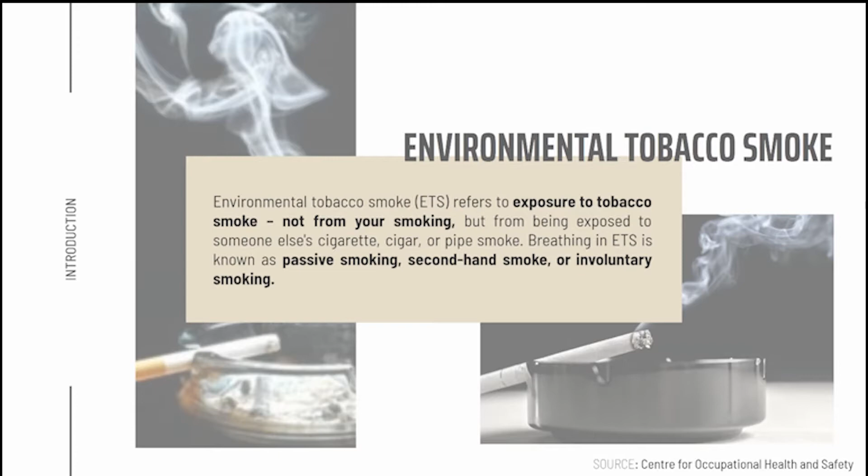As I introduce my research, I wanted to ask each of you: have you ever been in a room full of smoke, or a room where no one is smoking yet you can still smell odors that might be coming from a cigarette? If yes, that is simply environmental tobacco smoke, or ETS for short, which refers to tobacco residues that can be passed to a non-smoker involuntarily through breathing and touching contaminated areas.

According to Tobacco Atlas, there are three types of smoke exposure: first-hand, second-hand, and third-hand smoke, wherein residues of tobacco products stay longer than we actually know, and if not properly cleaned or sanitized, it can lead to worst-case scenarios.

Scientific study shows that smoking indoors drastically increases the concentration of air pollutants. Some studies have also shown that higher, consistent levels of toxic particles can be found when air is recirculated, such as in air-conditioned environments. Here are a few of the thousand air pollutants and carcinogens causing cancer that can be found in third-hand smoke or environmental tobacco smoke.

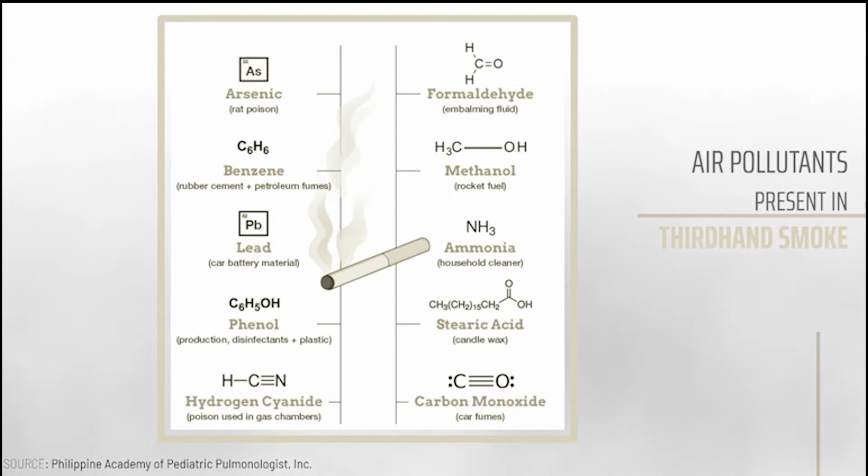As for existing basic precautions regarding third-hand smoke, it has been proven that it cannot be eliminated simply by opening windows and providing good ventilation. We usually use bleach, ammonia, and other chemicals that can also leave residues, releasing particles into the air that may still cause issues with breathing and allergies.

There are also three phases of how ETS can affect our health. It may start with simple asthma and coughs, ear infection, and in worst case scenarios could lead to cancer and other respiratory diseases. As per study, tobacco smoke contains more than 7,000 chemicals, including hundreds that are toxic and about 70 that can cause cancer.

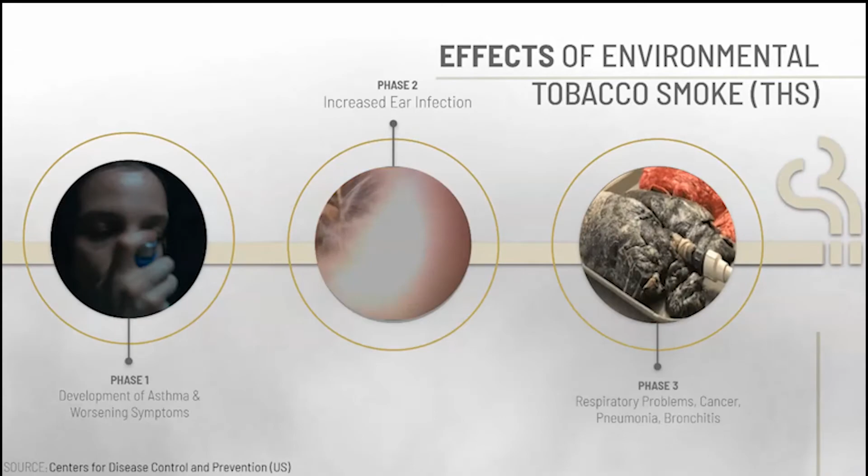According to the World Health Organization, 15 billion tobacco products are sold worldwide, and it also shows that 43% of male Filipinos and 8.5% of female Filipinos aged 15 years old and above have already started smoking. Additionally, 10 Filipinos die every hour due to tobacco-related diseases.

The tobacco industry is a powerful force that does not fear the actions of smaller nation-states because of high demand and global market power. In this light, it can be seen that in 2016, the revenue from the top 6 largest world companies was almost equal to the gross national income of our country.

Aside from revenues our country can get from the tobacco industry, the Philippine tobacco industry is also known as the strongest tobacco lobby in Asia. The Philippines is also the 15th biggest consumer of cigarettes in the world.

To cater to the high demand for tobacco products, 0.29% of agricultural land is devoted to tobacco cultivation, distributed in 23 provinces all around the Philippines, covering approximately 30,352 hectares that can produce at least 84.96 billion pieces of cigarettes a year. Now that I have discussed environmental tobacco smoke, smoking, and the tobacco industry, let's move on to the coexistence of smoking and gambling.

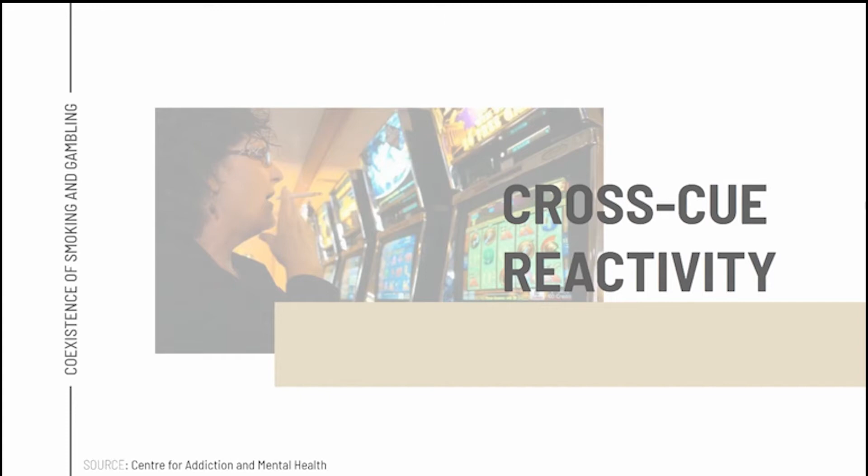According to the study by the Center for Addiction and Mental Health, they examined cross-cue reactivity among batches of regular smokers, casino players, and cigarette-smoking casino players.

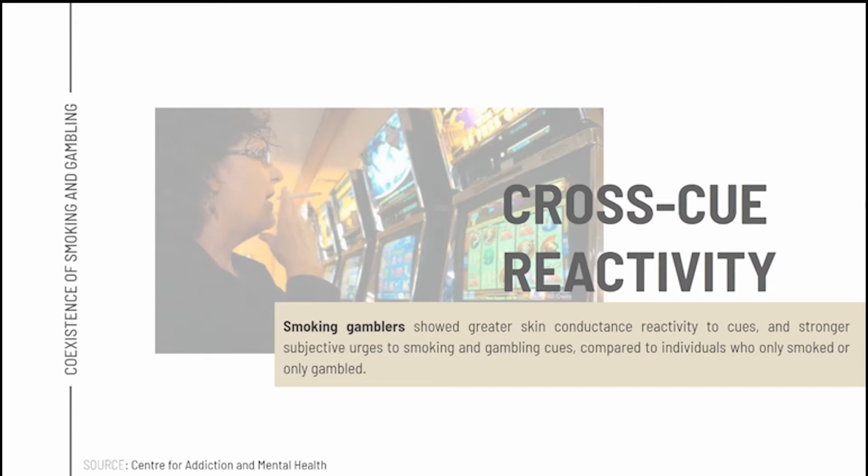They are all exposed to discrete cigarette, poker, and neutral cues, while skin conductance and psychological urges to smoke and gamble were measured. It showed that smoking gamblers had greater skin conductance reactivity to cues and stronger subjective urges to smoking and gambling cues compared to individuals who only smoke or only gamble.

According to the 2015 Gambling Prevalence Survey, 79%, or a total of 17,314, are confirmed smokers and gamblers at the same time, and the bigger portion of the respondents were males.

According to PAGCOR, the Philippines ranks fourth for having the highest gambling revenue based on tourists in the whole of Asia, gaining a 22.9% increase from the year 2018.

On top of that, the top four casinos are located in the capital of the Philippines, which is Manila, attracting more tourists to come. Based on my research, casinos were located alongside high-end hotels, wherein they attract or lure hotel guests through a typical casino layout.

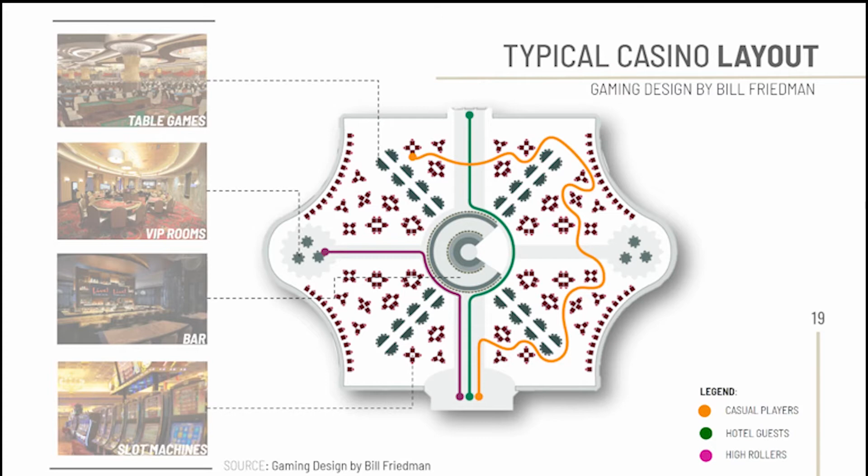As for the casino designs here in the Philippines, designers incorporate low ceilings and bright lights to make gamblers lose track of their time.

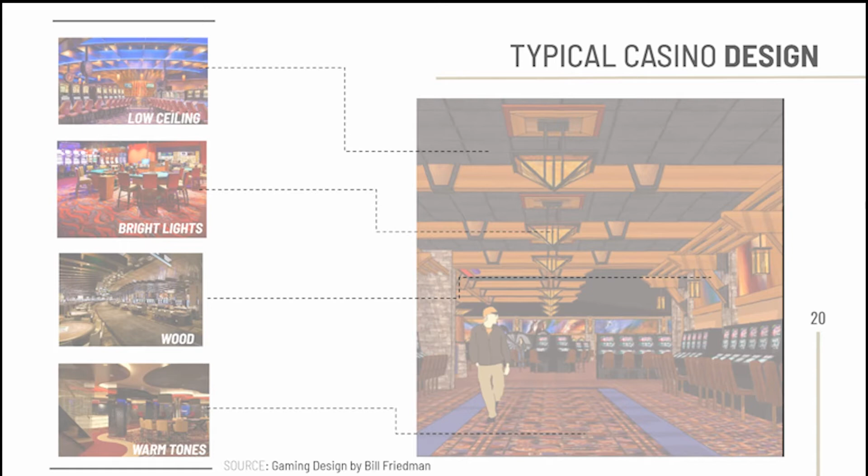One of the key ways that casinos keep their guests from going home is by engaging all their senses. Most casinos here in the Philippines allow smoking on their premises.

Most casino owners, led by the President and Chief Executive of Manila Casino Travelers International Hotel Group, Kingson Sian, wrote a petition to President Rodrigo Duterte to be exempted from Executive Order Number 26, or the smoking ban law.

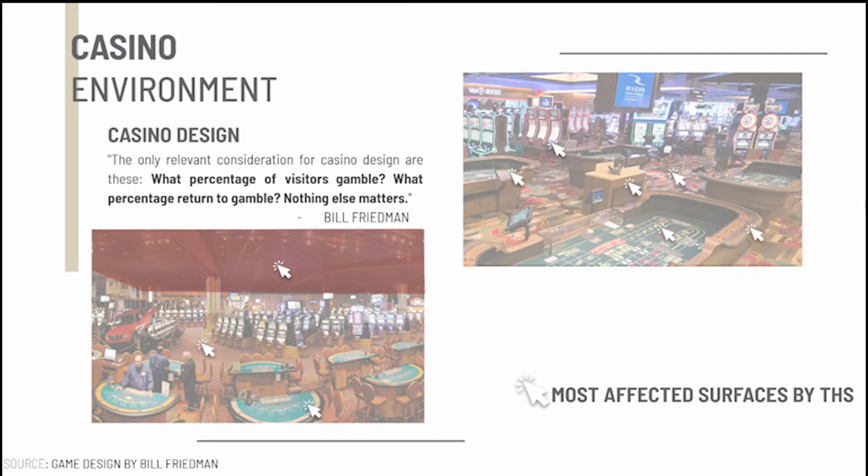Furthermore, these are the most affected surfaces by third-hand smoke, namely the ceiling, floors, walls, and gaming tables. These are some of the simulations I made based on the research of smoke behavior from the Philippine Academy of Pediatric Pulmonologists Incorporation.

This study aims to improve the indoor air quality in Philippine casinos and to propose an alternative surfacing material by utilizing locally found raw materials to address the main problem of the study.

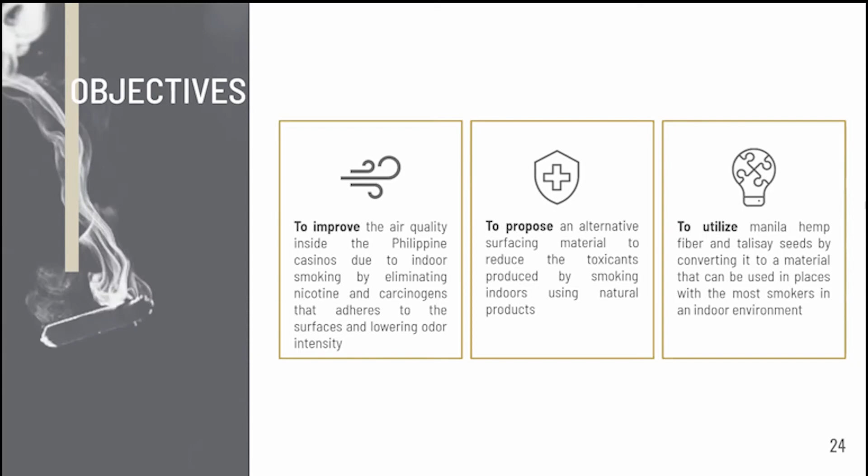This study will be beneficial to the development of science in studying other possible uses for Manila hemp and Talisay seeds, especially in preventing the transmission of substances from tobacco products inside spaces which are subjected to environmental tobacco smoke.

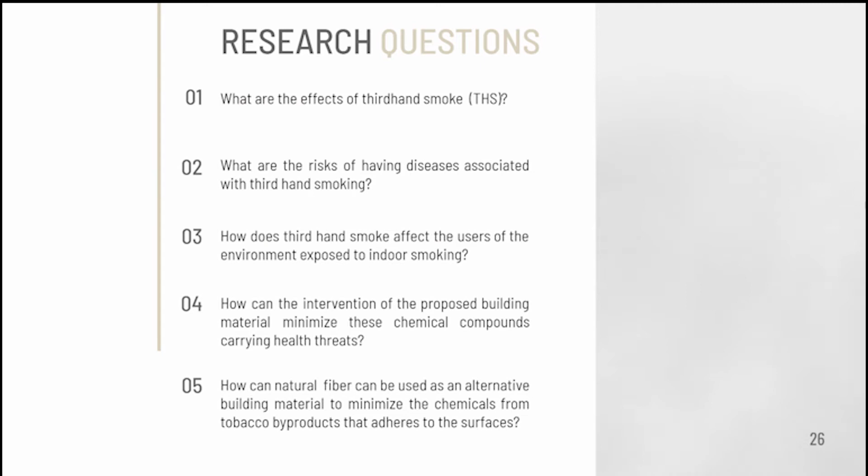This study will discuss the effects of ETS, down to which natural fiber can be used to mitigate the environmental issues caused by ETS.

These are the whys this research must answer in order to come up with an appropriate thesis statement.

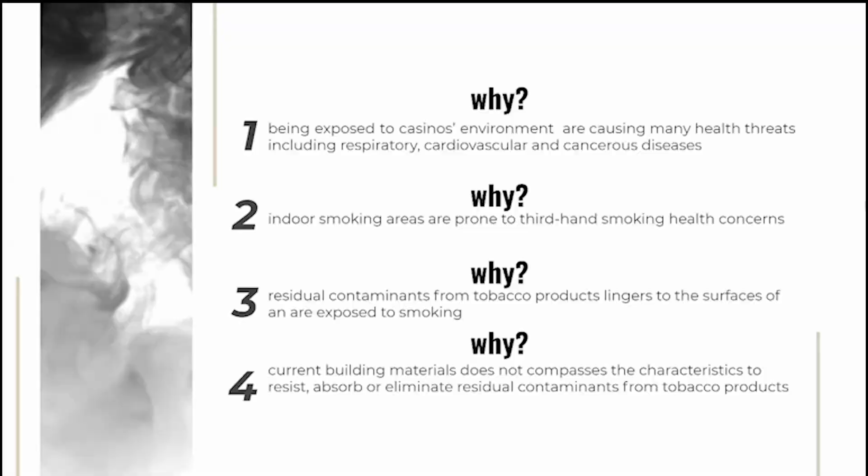After analyzing the dialectics of the study, I found out that exploring the capabilities of Philippine agricultural products can actually help minimize ETS health risks.

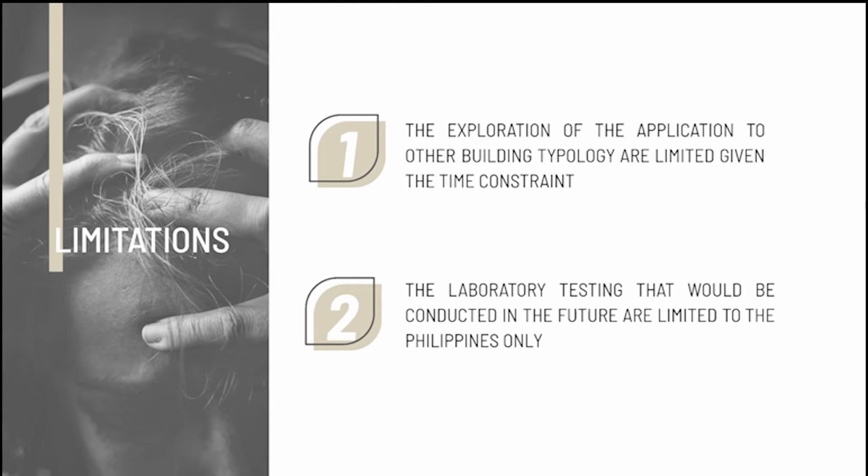This study is limited to one typology, which is the Philippine casinos, but is open to further study in the future. Some tests are also limited, and only tests made before the pandemic will be shown.

Now we're down to the frameworks and related studies of the research proposal. The process started by identifying the focus of the study, which are the casino environment, environmental tobacco smoke, and the application to architecture.

The effects of third-hand smoke were then identified, which led to finding a certain common ground for the three main concepts of the study.

Developing a material will then lead to sustainability within the design study, which may account further into lowering health risks we can get from third-hand smoke.

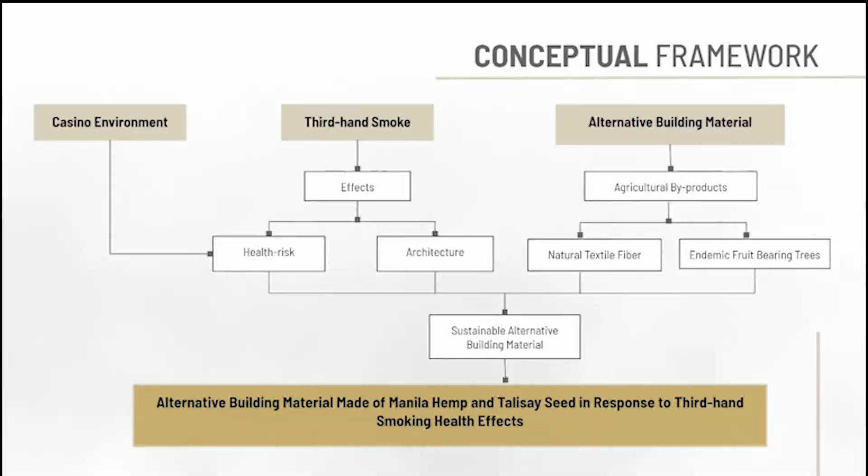So this will be the flow of the whole study, starting from defining the research area, which we did in the first part of the presentation, and now we're on to the material research in order to create our final alternative building material.

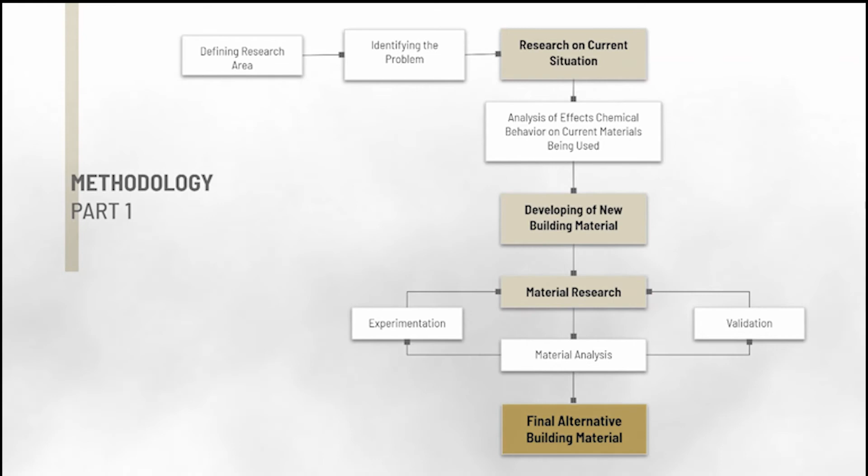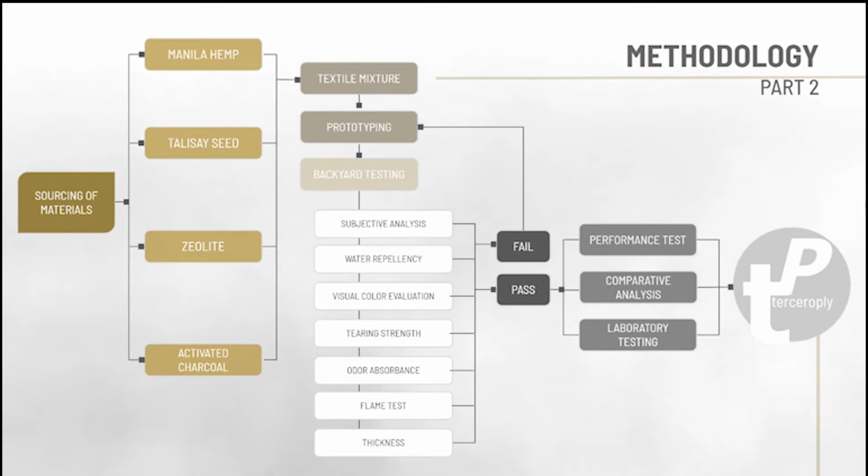For a thorough process of how I did my material research and analysis, I started with finding the most possible raw materials that are abundant in our own land, and then underwent various testing and analysis to determine the best formulation to create the material.

We will now be digging into the development of the end product of the study. I have studied the potentials of three natural fibers found here in the Philippines.

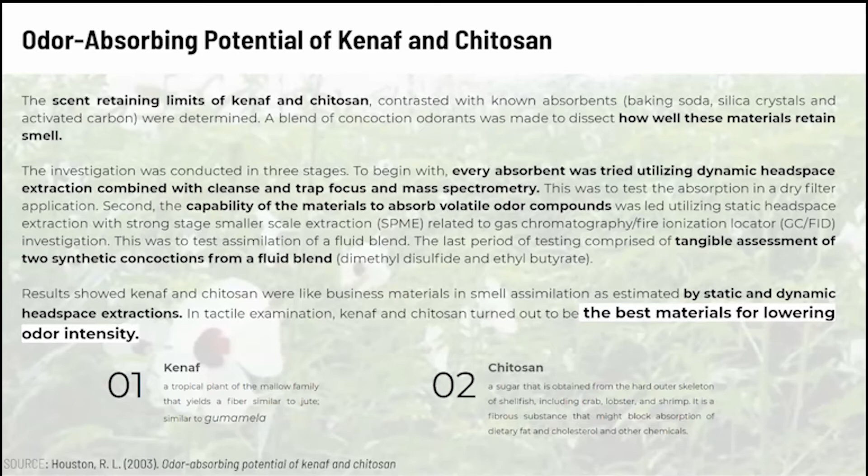The first one is the kenaf, which, according to the studies, can absorb odors when incorporated with textiles. It has many pores that serve as a natural trap. So this is simply the study I was talking about, the potential of kenaf to absorb air particles.

So this is salago. It is usually harvested in wild forest here in the Philippines. Its fiber is often used in combination with other fibers. It is known to contain natural mucilage that helps disperse the fibers.

It also has its own natural resistance to insects. Finally, the last one is the Manila hemp, also called Musa textilis or abaca fiber, which has a highly porous surface, making it a good absorbing material that can trap odor and dirt. It also has high tensile strength, making it good for building purposes.

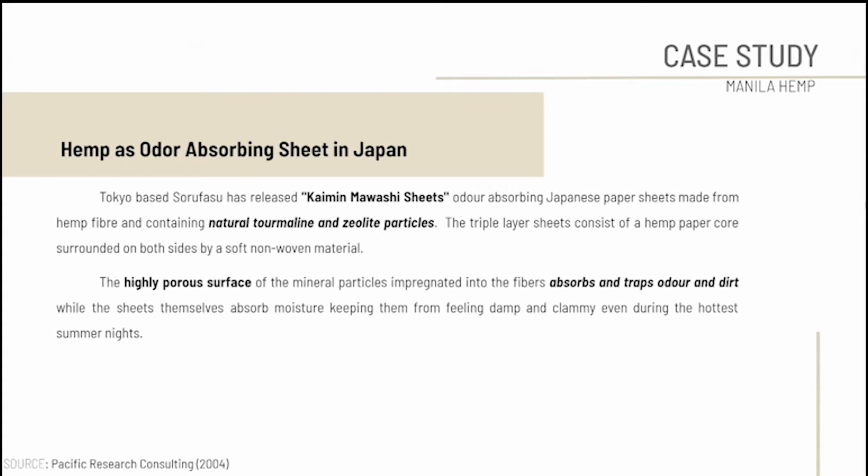Manila hemp is being used in Japan as a bed odor absorbing sheet. Another study also showed that Manila hemp, or Musa textilis, is being used as the filtration sheet in the surgical face mask we tend to use now on a daily basis to protect ourselves from getting or transmitting diseases.

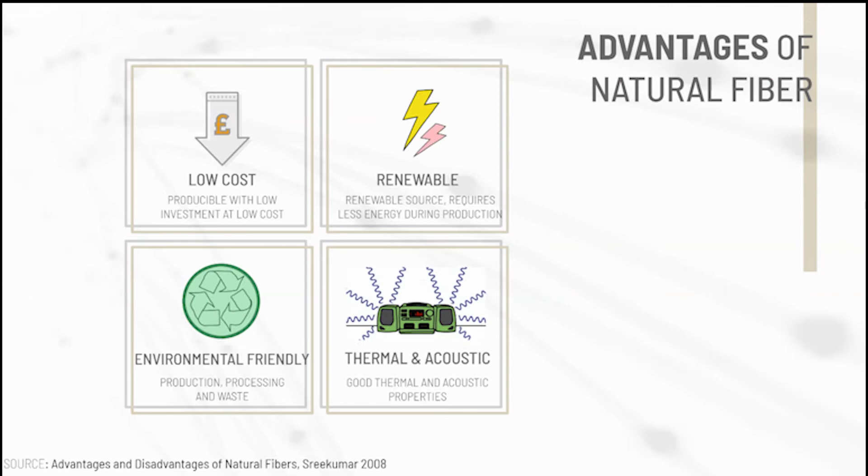Why did I choose natural fiber? Simply because it is very cost effective, sustainable, and has a lot of natural properties that can be incorporated through architecture. So this is the list I made to choose which of the natural fibers I studied had the most potential.

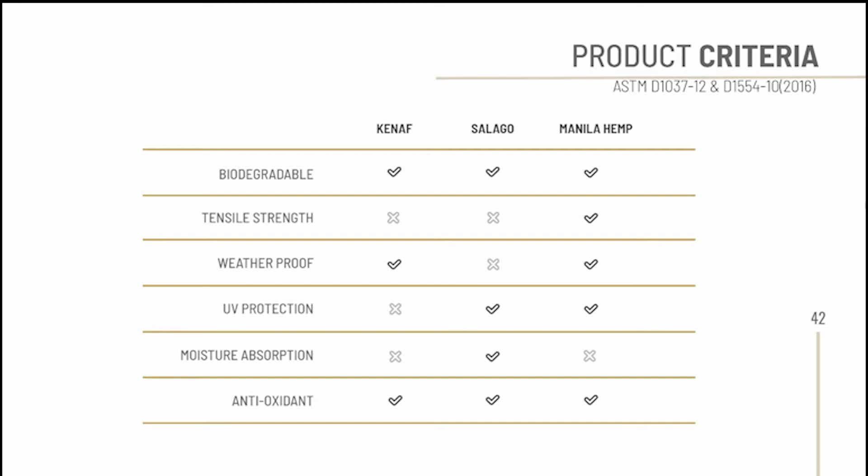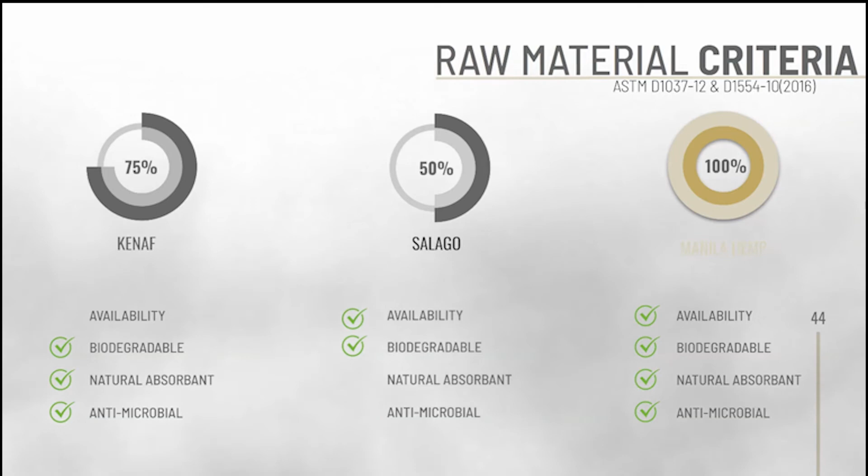These are the standard test methods I found in the database and studies from the Philippine Fiber Industry Development Authority. In this slide, we can see that both of the criteria I made showed that Manila hemp got the highest result. This is the production process for making the final product.

Stage 1: the fiber production. Preparing the fibers, weighing it. And now for the binding agent, I use zeolite and activated charcoal as an additive.

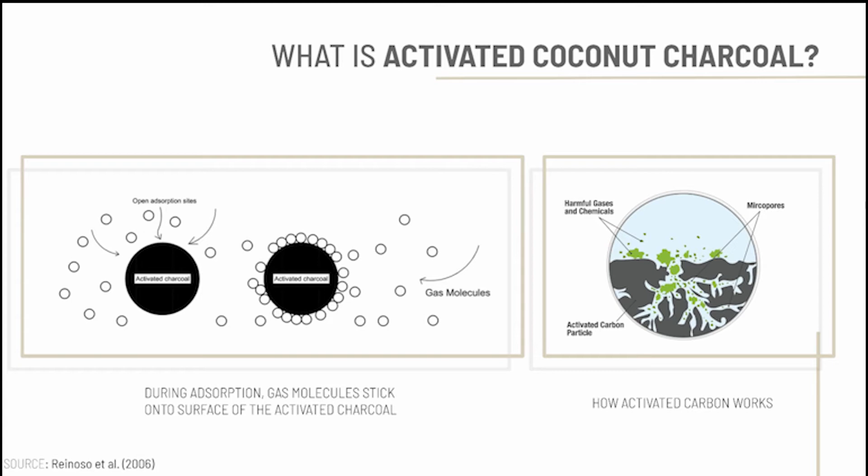This is what they look like. The potential of activated charcoal varies from a wide range. It can both adsorb and absorb tiny particles because it has small, low volume pores that increase the surface area available for chemical reactions. Another info is that 1 gram of carbon can cover 1,000 square meters.

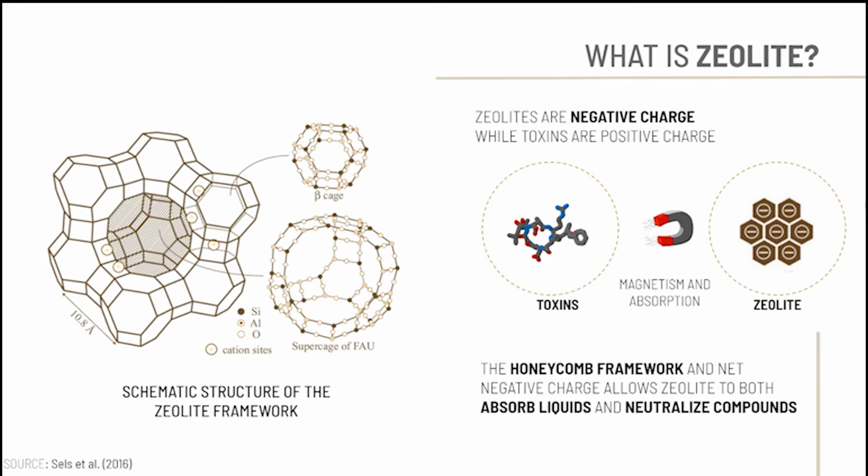Last but not the least, I also use the seeds of the Talisay tree, also known as the umbrella tree. Its seeds can be compared to a pili nut. It bears abundant fruits that just fall on the ground, being neglected. Studies about its seeds show that its natural oil can bind and precipitate proteins and various other organic compounds including amino acids and alkaloids.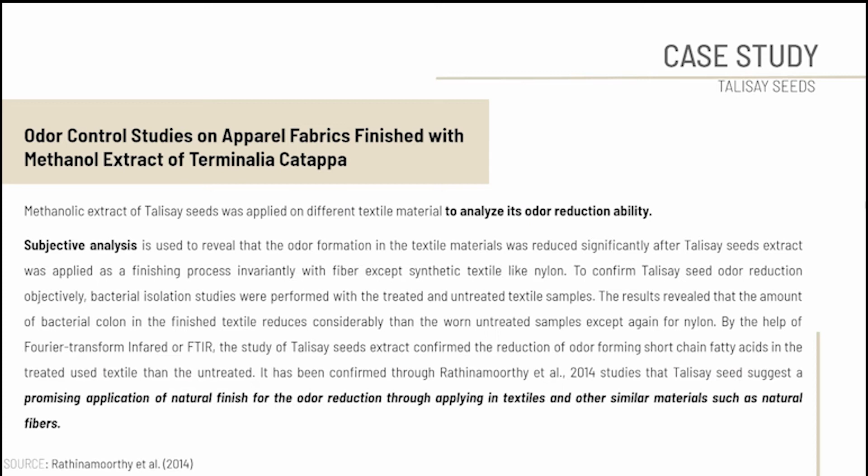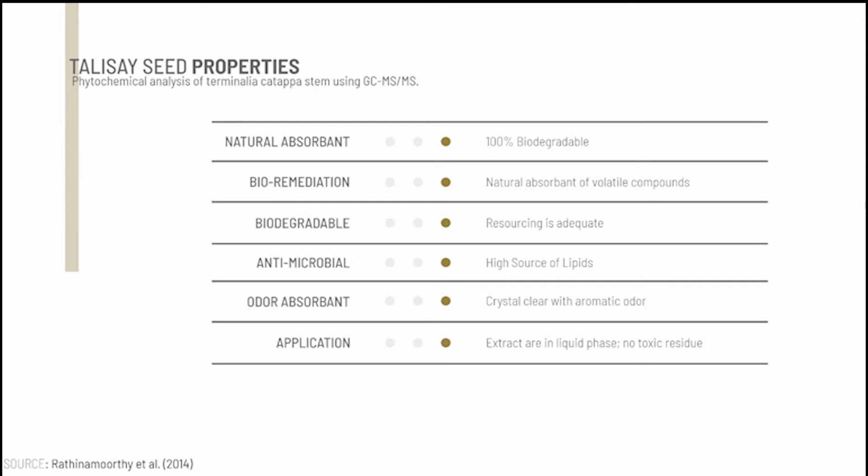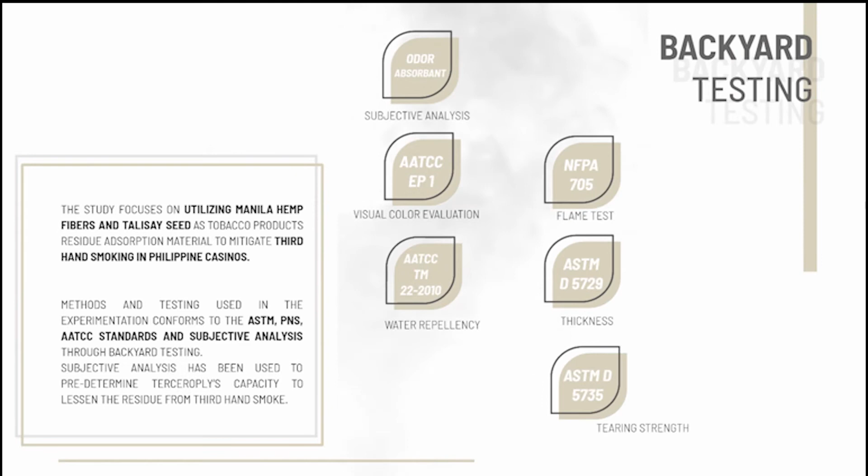Let's move on to the tests I have conducted. First, I had backyard testing for the following tests listed on the screen. I initially made 4 test samples.

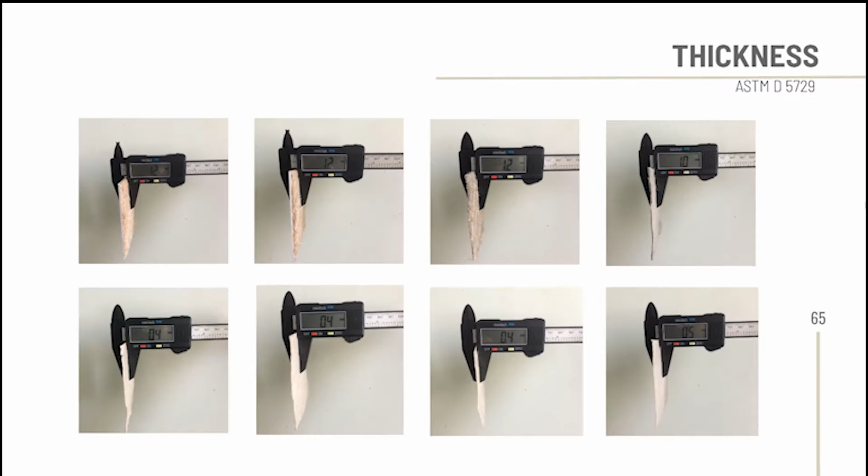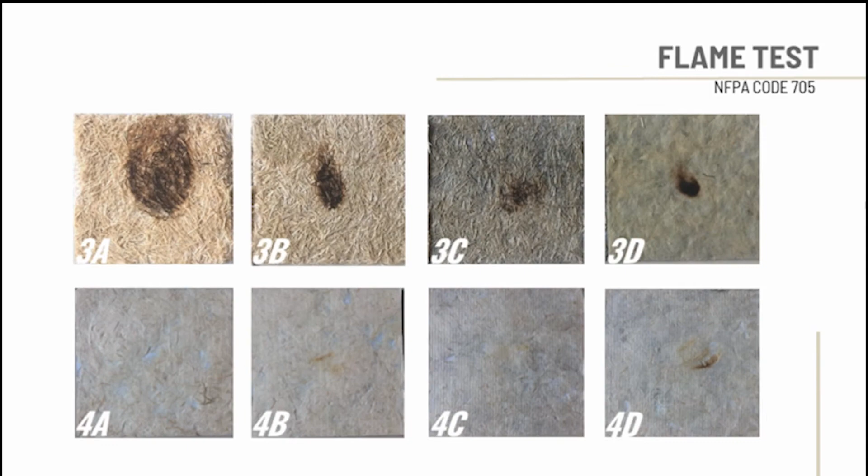Here I measured the thickness of each sample. I also evaluated its visual color, conducted a flame test, measured its water repellency, and lastly conducted a tearing strength test. These are my initial findings, which led me to further evaluate test sample number 4, for it mostly passed all the tests I conducted.

Now for the laboratory testing, final products were produced and tested at the Department of Science and Technology, Forest Products Research and Development Institute at the University of the Philippines, Los Baños. I wasn't able to collect the specimen used for the testing due to the lockdown.

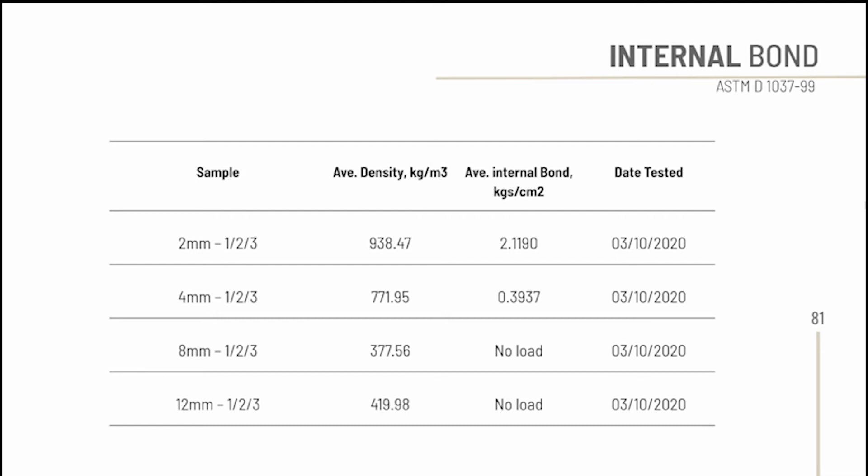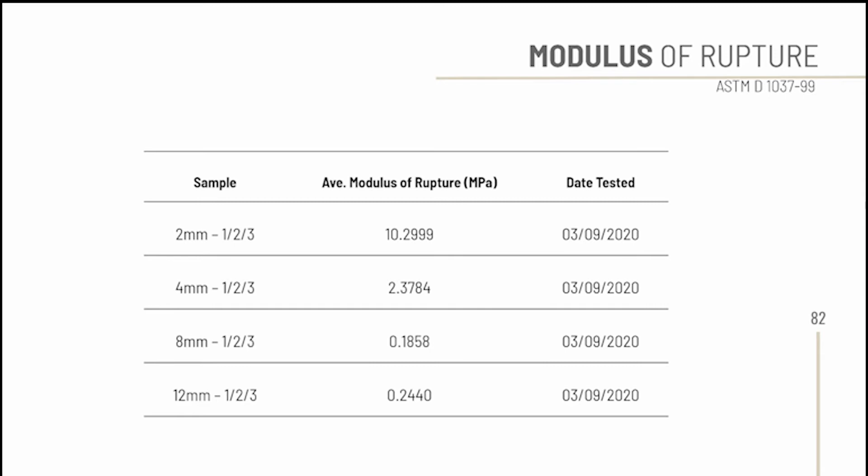The result for the internal bond showed that the thinnest sample needs a higher load to break the bond between layers. For modulus of rupture, it showed that 2mm and 4mm can be used on most surfaces, as it can bond without breaking.

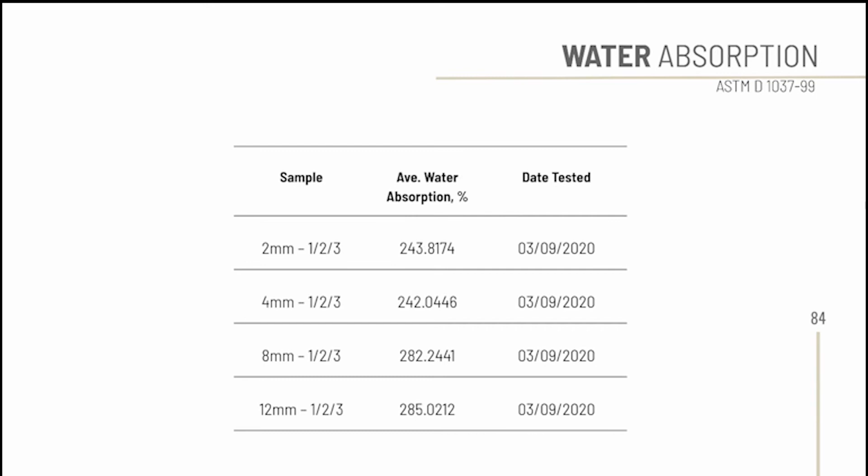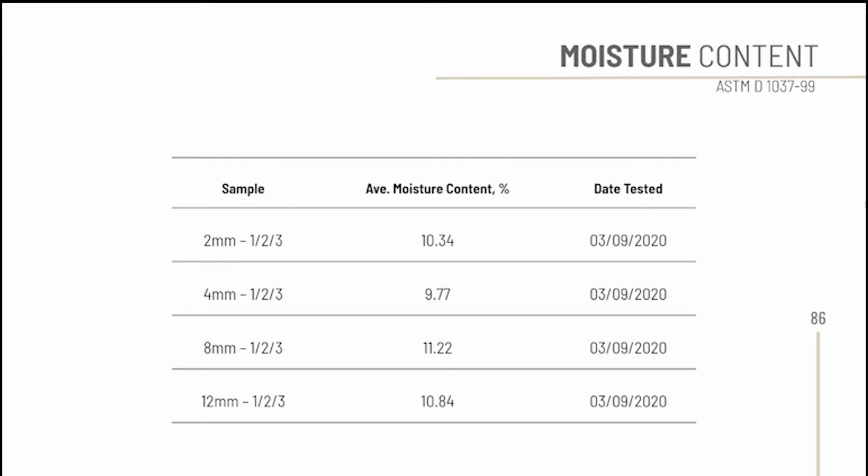Thicker specimens have greater stability performance, suitable for ceiling panels or wall panelings. Each specimen has relatively the same water absorption capacity. It shows that the specimen falls within average standard density for veneers and panels. Acceptable moisture content for wood products used for structures is between 6 to 14%.

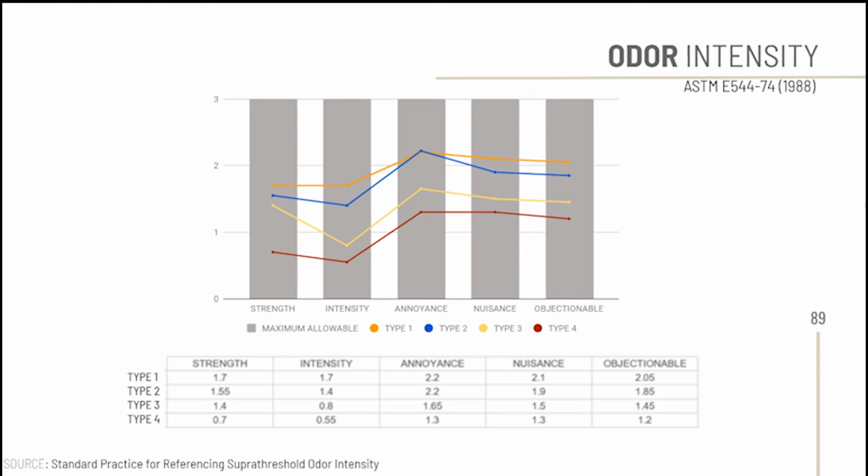Lastly, exposing the panels to tobacco smoke according to the standard practice for referencing suprathreshold odor intensity, each specimen falls below the maximum allowable rate for odor strength, intensity, annoyance, nuisance, and objectionability.

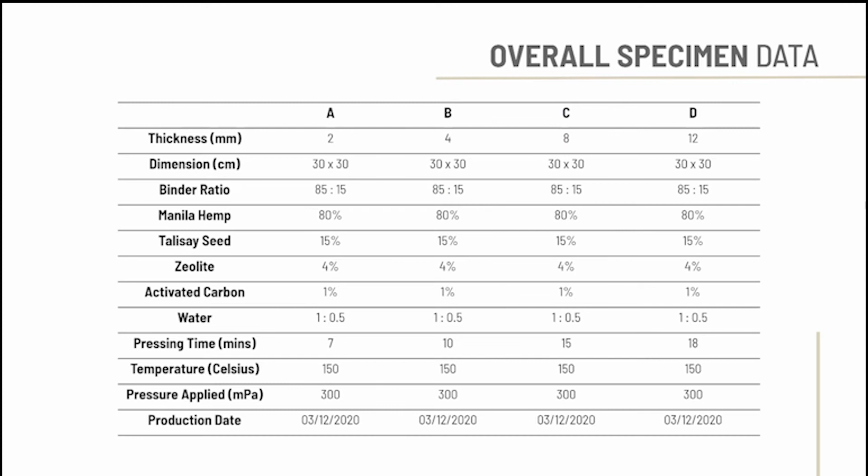So this is the overall specimen data of the laboratory test I conducted. Feel free to pause the video and read through the table shown on the screen.

And now for the action part, let's move on to the product's business plan and application.

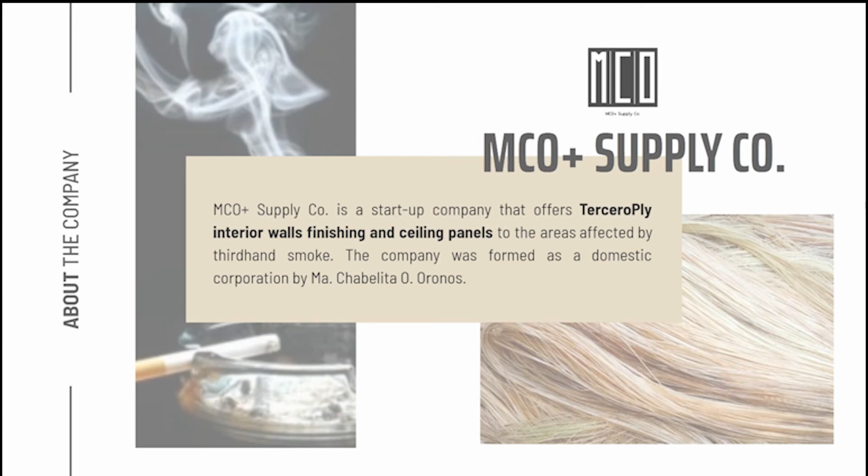I would like to introduce to you my company, named MCO Plus Supply Company, the pioneer company that will offer interior wall finishes and ceiling panels made of Manila hemp, specially made for third-hand smoke. Our company's vision is to become well known for producing expert quality and design services by using our panels, especially curated for environmental tobacco smoke.

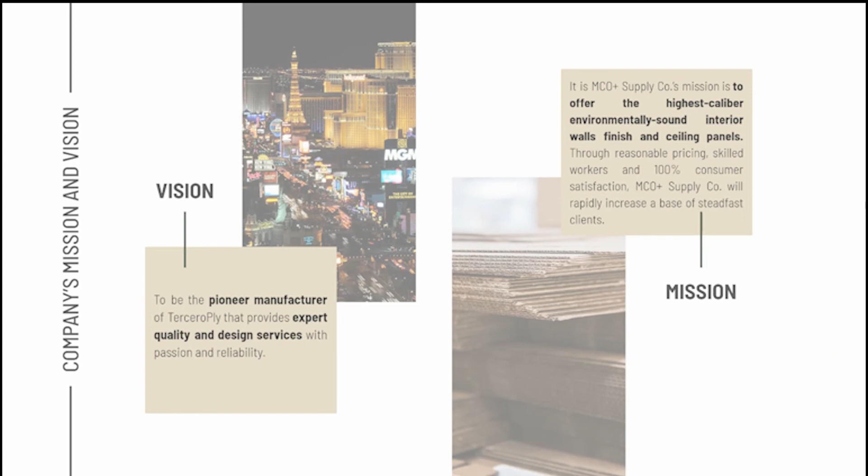It was also our mission to offer the highest caliber products with reasonable pricing and is made with our very own skilled workers. MCO Plus Supply Company would focus solely on the detailed satisfaction of our dear clients and to be efficient in the industry.

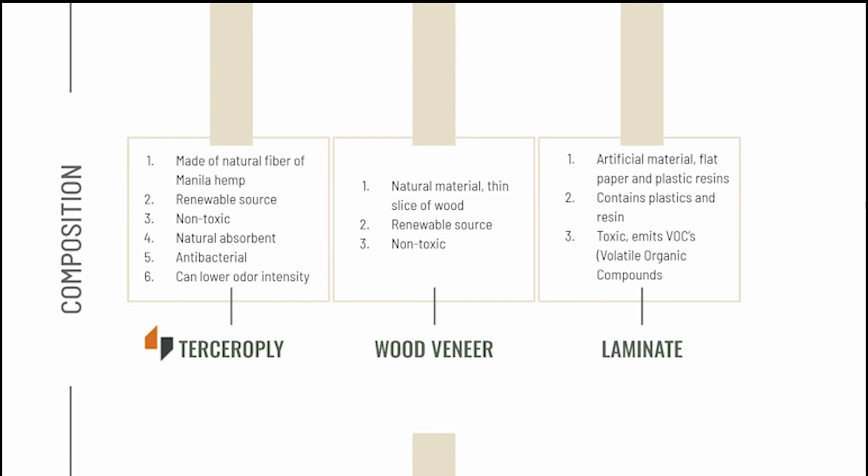I also did a product benchmark between the conventional materials versus our very own Terceroply. Here, we can see the advantages of using Terceroply by looking at its composition compared to wood veneers and laminates.

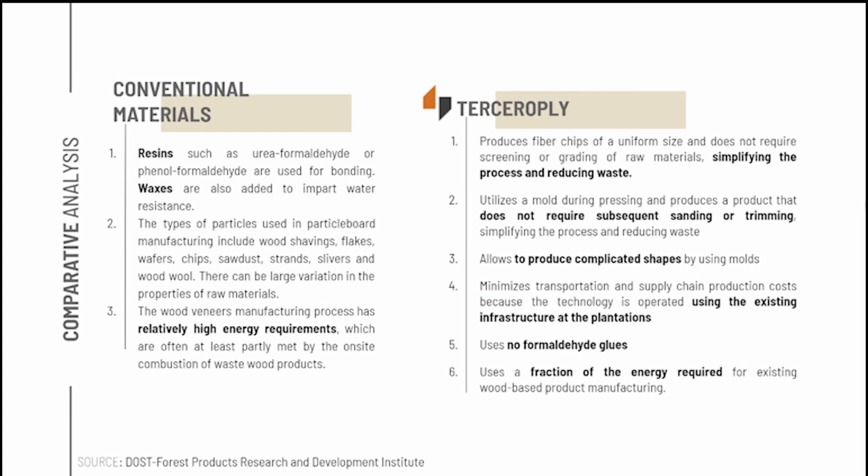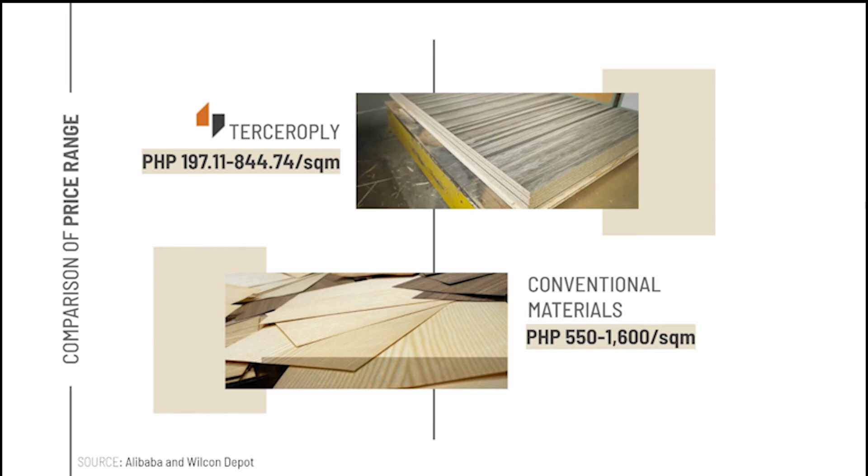So for the costing, I added up 30% markup to my total production cost per square meter. It ranges from 197 to 845 pesos per square meter depending on the thickness. On the other hand, conventional material costs between 550 pesos to 1,600 pesos per square meter, depending also on the thickness, which is 58% higher than the cost of Terceroply.

Now let's pass on to the installation and application of Terceroply. Our product comes in different thickness, dimensions, sizes, and shapes that can be used as wall covers, ceiling tiles, tabletops, and can be incorporated at mobile interiors.

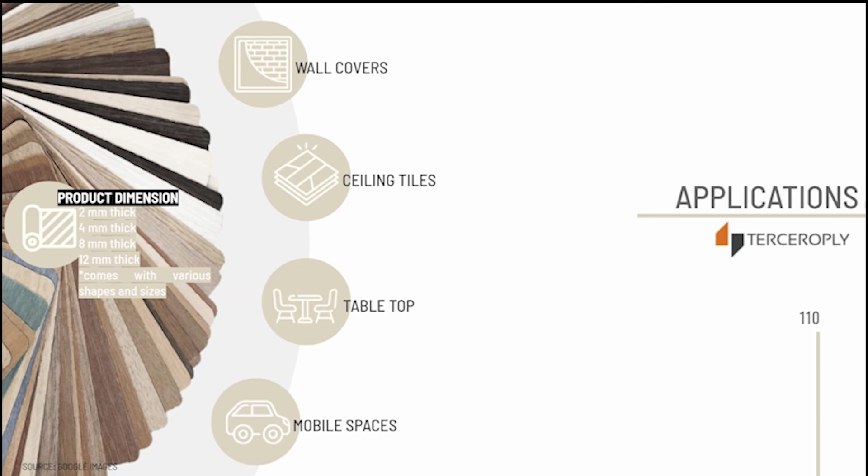It also has easy installation by using the recommended adhesive and skilled worker to apply it. As I have said, it can come with different sizes. It can be customized to your desired wall covering with minimal installation tools needed.

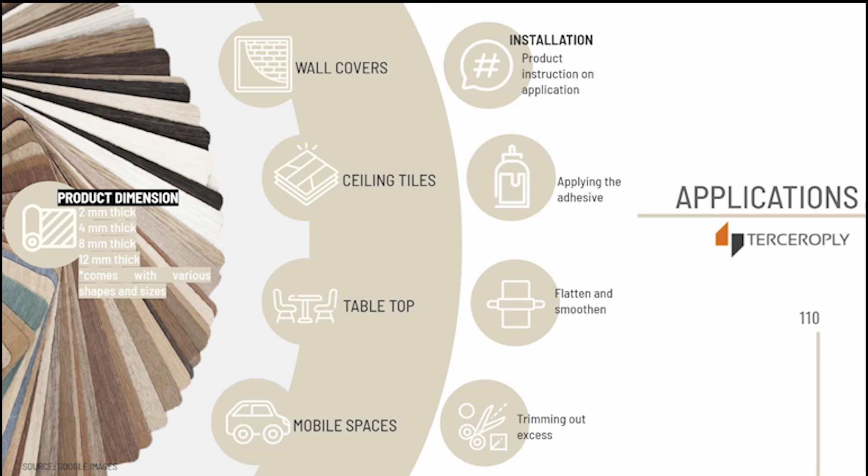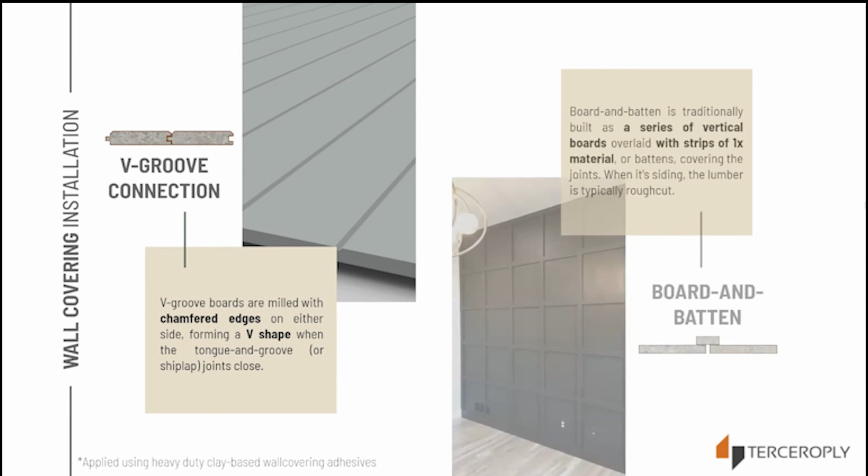It also comes with different patterns and connections, namely the shiplap connection, beadboard connection, V-groove connection, board and batten connection, drop siding, rustic planking.

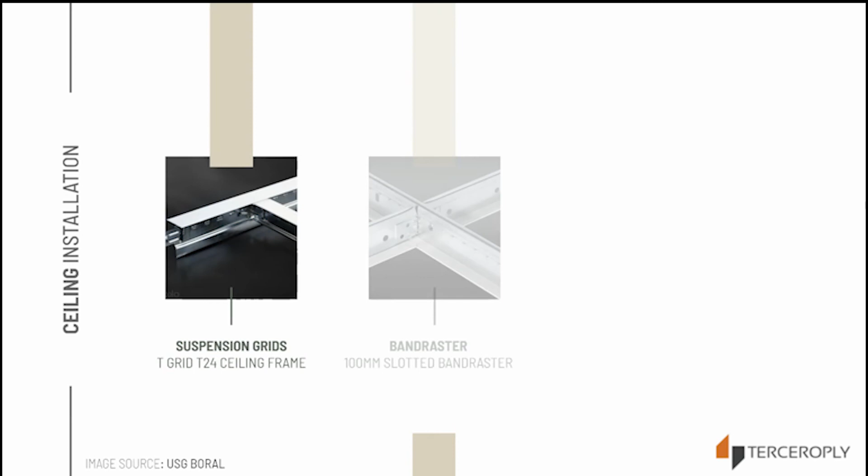And for the ceiling panels, it can be installed using suspension grids, bandrasters, so it can act as a concealed grid, suspended and hanging ceiling.

The finish and pattern of the Terceroply will be very raw and simple, as we would like to retain its appearance to look more natural. We will be toning it with warm tones to provide an array of psychological benefits and the like.

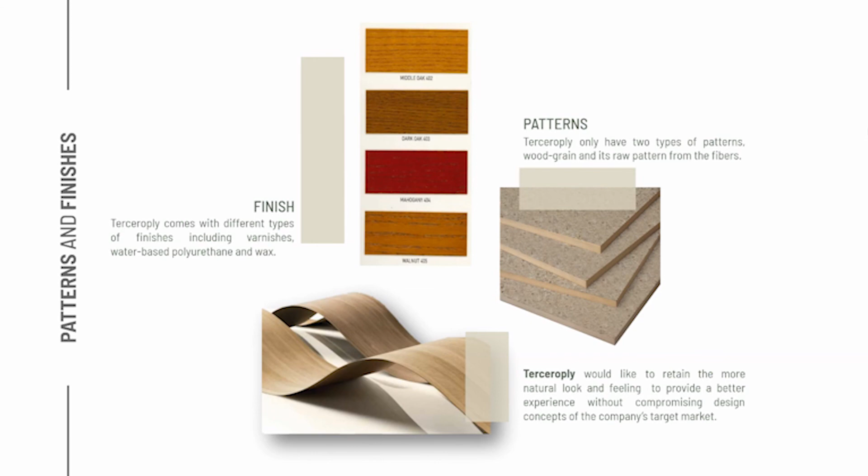As I have stated on my scope and limitation, I will focus only on Philippine casinos. However, Terceroply had a wide range of use. Its versatility can be used in different spaces like terminals, bars, and designated smoking rooms.

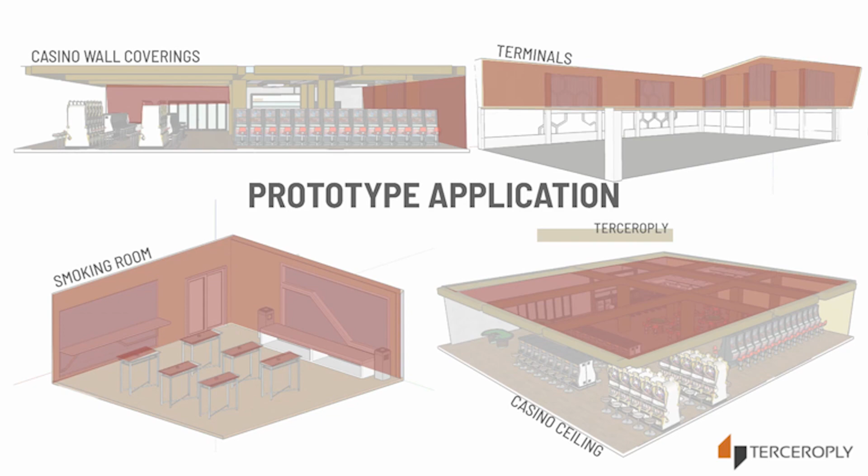Here are some prototypes on where we could apply our product in the future. It can be used as an alternative to woods or laminated panels, which are often used in interiors of casinos.

I have now come to the end of my presentation. In summary, I discussed about environmental tobacco smoke, its effect, and its current measures to prevent it. I have also discussed the gaming and tobacco industry in the Philippines, leading to the development of our company's product, the Terceroply, its advantages and installations and applications, and a little introduction of the MCO Plus Supply Company.